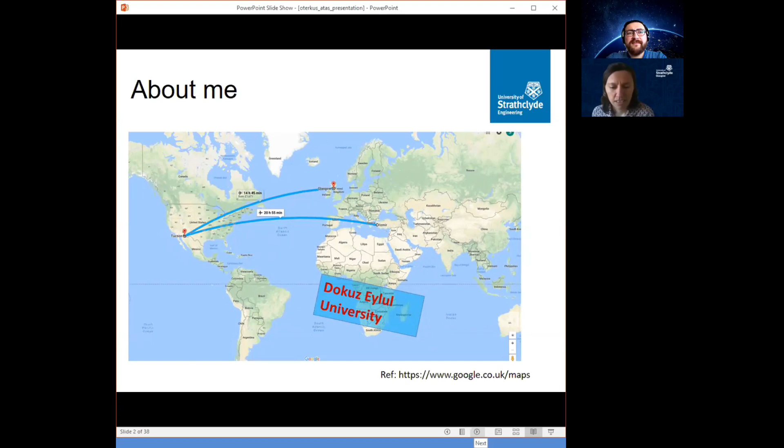Before I start, I would like to briefly introduce myself. I'm from Izmir, on the west coast of Turkey, and I did my undergraduate degree at Dokuz Eylül University in this very nice city, in the mechanical engineering department. After I finished my undergraduate degree, I decided to go for a master's degree, then in the same city, I did my master's again in the mechanical engineering department. Then after I finished my master's degree, I decided to have a PhD, and for that reason I applied for a PhD position at University of Arizona.

I was accepted, and I moved to Arizona after deciding for a PhD. After I finished my PhD, I decided to have an academic position, and I started looking for universities for opportunities. Then I was offered a position from University of Strathclyde, and then I moved to Glasgow in 2015. Since then, I'm working as an academic at University of Strathclyde in Glasgow.

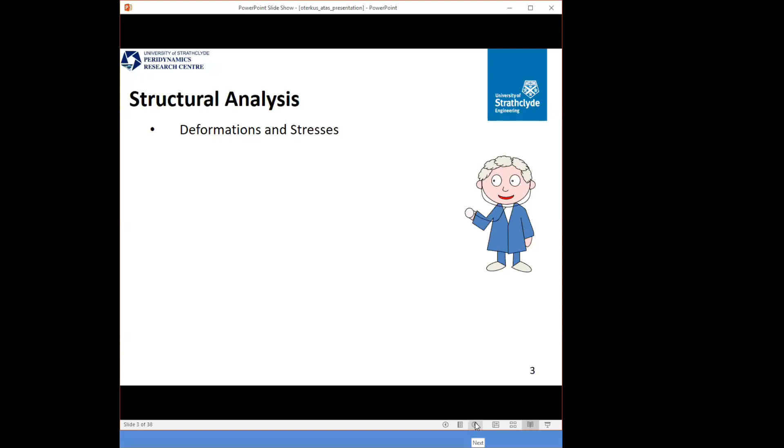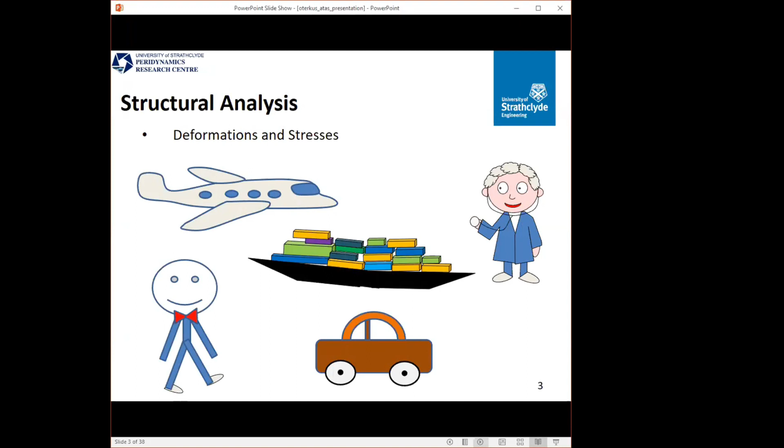So I'm a structural engineer. As a structural engineer, we can be considered as doctors of structures. And when we say structures, they can be anything you can imagine - it can be a ship, an airplane, a car, or even our bodies. We can consider all these as structures. When these structures are subjected to external loading, they start deforming. As the structures deform, they start feeling uncomfortable, and their stress level increases, actually just like ourselves.

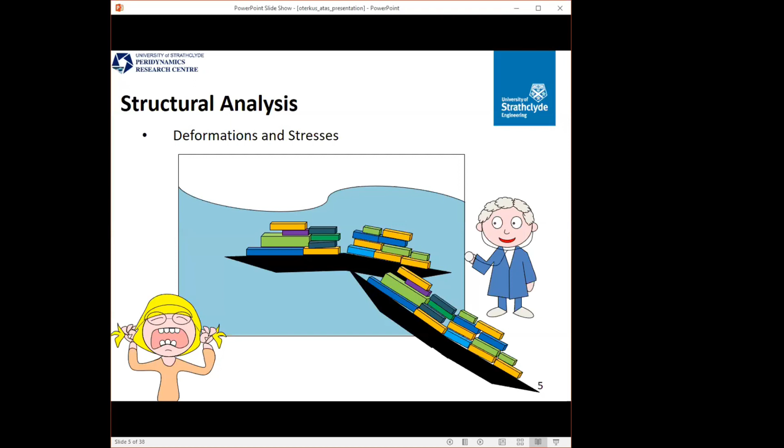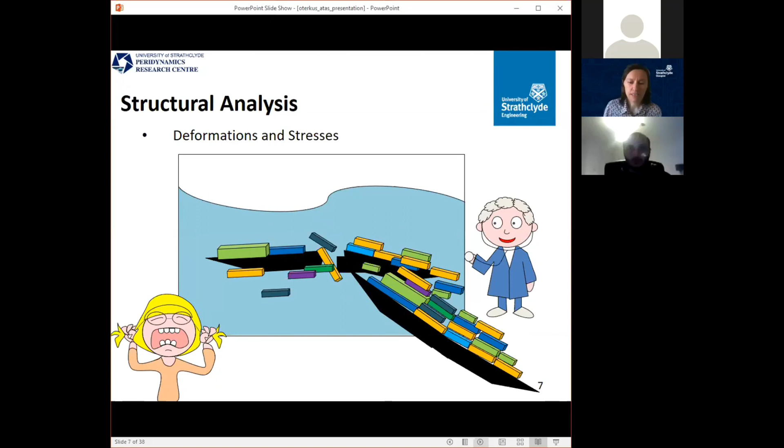When we are loaded with too much stress, we also feel uncomfortable. And if the stress level increases too much, the structure fails as a result of cracks, and catastrophic failures can occur. This means that we need to take some actions to prevent these. As a structural engineer, we need to consider how we can predict these cracks before they actually happen, for our safety. We need to understand why these cracks occur, where and how they start, and how they propagate.

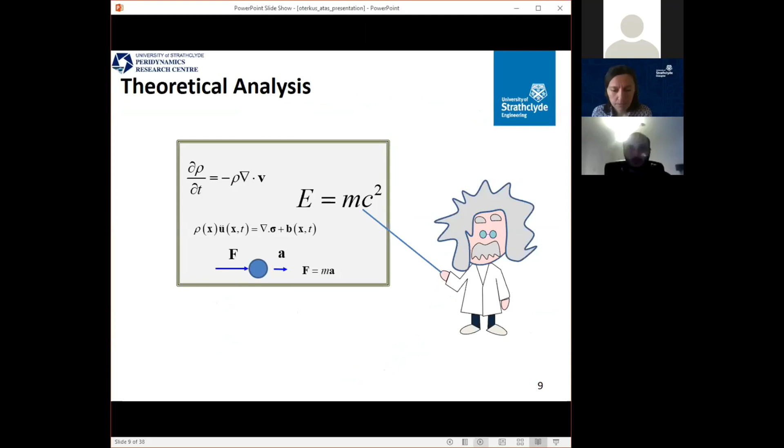So we want to understand the behavior of the structure during the damage process. And if we can do this, maybe we can suggest some solutions to prevent or minimize these damages, to avoid catastrophic failures. In old days, people were using theoretical calculations for finding these damages or cracks - just simple hand calculations, but they were mostly limited to simple cases. Instead, we can use numerical models. Today we have computers, and we can use them to make crack predictions for very sophisticated crack problems.

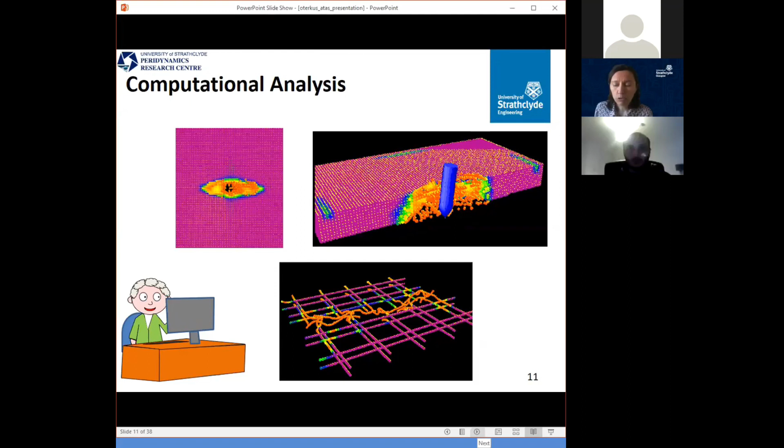For example, by using computers, we can simulate what happens if a bullet hits an armor material, which is very important for the safety of our soldiers, so that we can take necessary actions. Or what happens if a missile hits a concrete material? We want to know this so that we can take necessary actions. These are our computer simulations, and you can see what can happen, what type of damages can happen. We need to look for methods to predict these damages.

A suitable method can be what we call PeriDynamics. It's such a method, such an approach that can be used for analyzing cracks. Just like medical doctors can help you handle your stresses, we can help any type of structure to prevent cracking by using PeriDynamics. But what is PeriDynamics?

In order to better understand what PeriDynamics is, we need to look at two concepts: cracks and local versus non-local behavior.

Although we don't realize it, cracks are actually part of our lives, and in most cases they're things we don't want to happen. For example, if you buy a brand new phone and drop it on the floor, you'll get cracks, and it'll be very annoying to use. Or if you have a nice cup and drop it, you'll have cracks and may not be able to use it again. So these are things we usually want to avoid.

However, sometimes you want to have cracks. For example, if you want to enjoy a chocolate bar, first you need to open the package, and to do that you need to tear it, creating a crack. Once you open the package, your teeth need to split the chocolate bar into smaller pieces so you can enjoy it. So it's sometimes fun to have cracks.

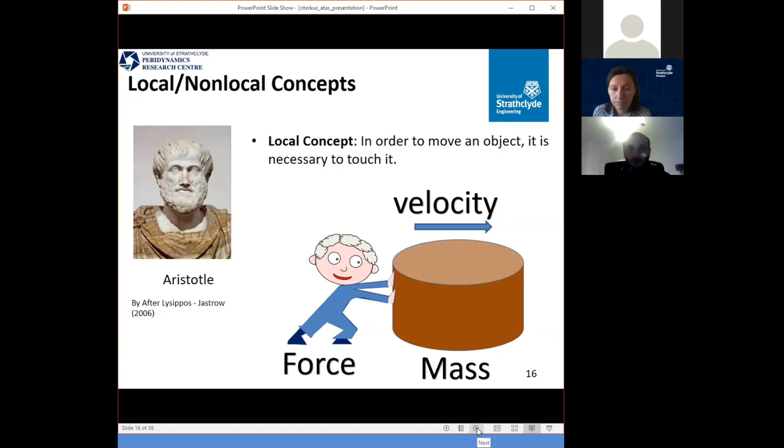In order to better understand the difference between traditional approaches and PeriDynamics, we need to look at local and non-local concepts, because traditional approaches are based on the local concept, but PeriDynamics is based on the non-local concept. The definition of local concept was introduced long ago by Aristotle, who mentioned that in order to move an object, you have to push it, you have to touch it. Although this is correct, it's not complete.

Today we know that objects far from each other can still interact. In other words, if you want to move an object, you don't need to touch it, just like gravitational force. For example, Newton was sitting next to a tree and the apple fell on his head, but the ground didn't touch the apple - it just fell down because of non-local effects. There is a non-local interaction between the apple and the ground, and it fell to the ground.

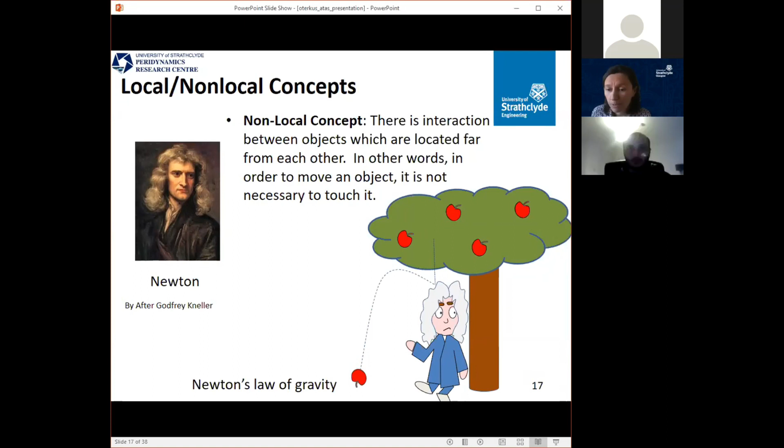PeriDynamics is based on this non-local concept. The word PeriDynamics comes from Greek. 'Peri' means surrounding, which represents the non-local interactions between different objects, and 'dynamics' means force between these interacting objects.

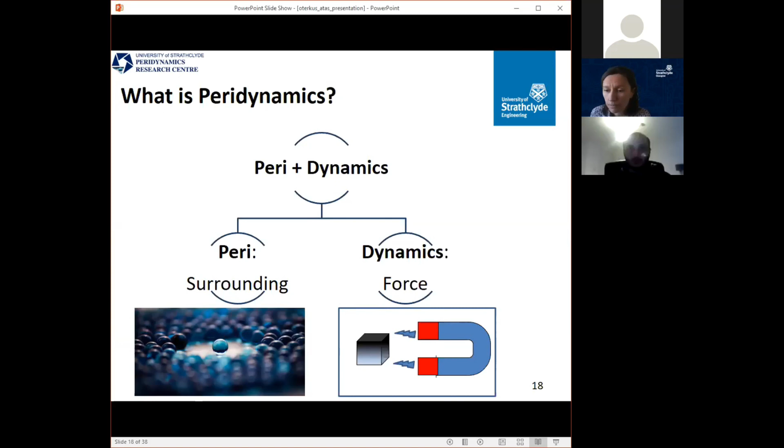As engineers, we would like to simulate and know how our structure behaves. For that, we need to create a mathematical model to represent our real structure. So we subdivide our structure into small parts so that we can represent the real structure in a computer. We call these traditional methods, by subdividing our regions. When we subdivide into smaller parts, these parts only interact with their nearest neighbor.

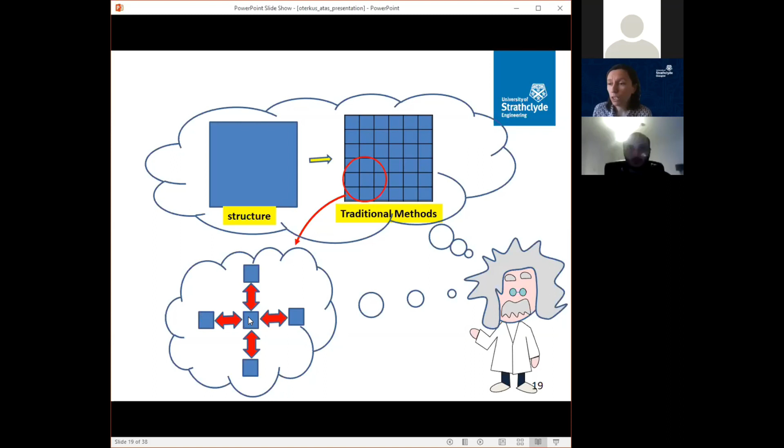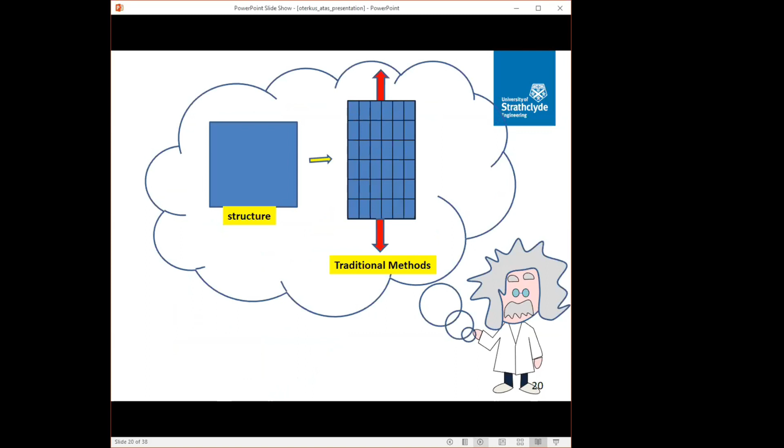This is something like having four neighbors and only interacting with them - this is just a representation of traditional methods. By using traditional methods, you can find how your structure will deform under loading conditions.

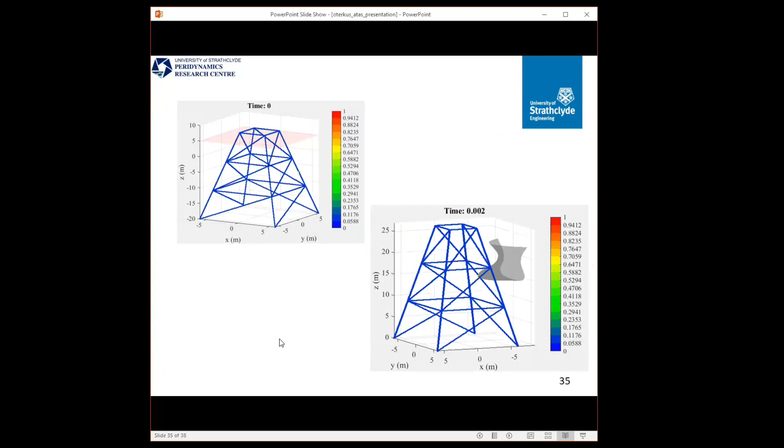Here are some other results for you to have an idea how PeriDynamics can be used. Offshore structures are inside the sea and subjected to harsh marine environments, so anything can happen. Because of this harsh marine environment, damage can occur in these platforms. Again, by using PeriDynamics, we can predict this behavior. Or consider what happens if a ship hits your platform, since these platforms are in the sea - again, by using PeriDynamics, we can predict what can happen.

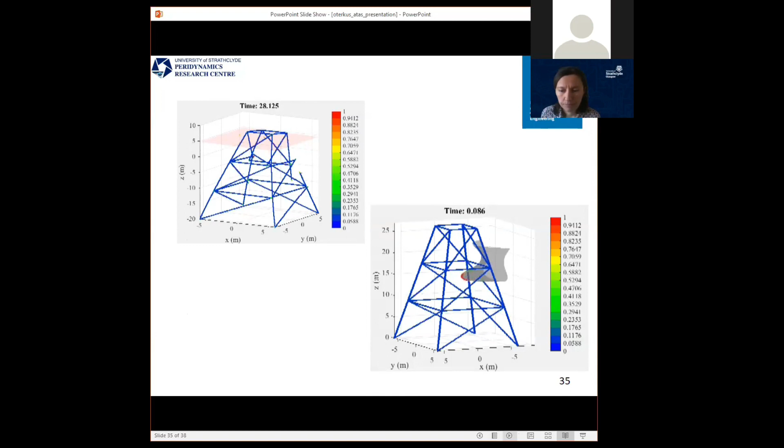As you can see, we can investigate many different challenging crack problems by using PeriDynamics. Because of this reason, we established the world's first research center on PeriDynamics here at the University of Strathclyde, and we are hoping that we will continue investigating many more different cracking problems.

Thank you very much for your attention.